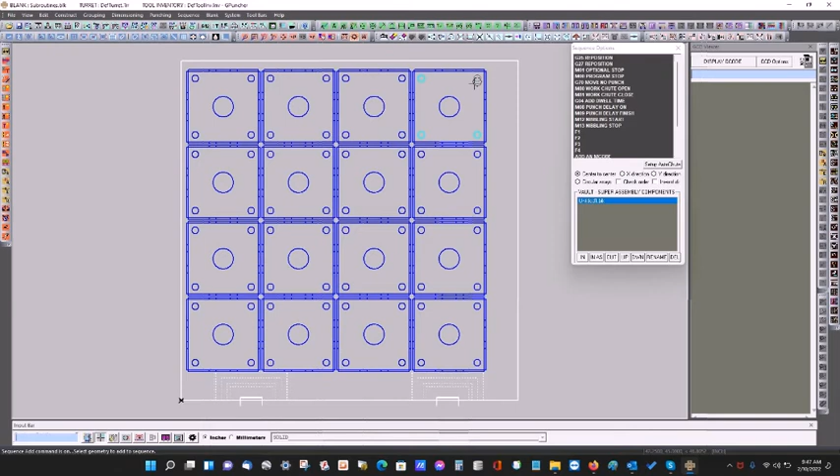The first step is to open a subroutine, and then you can either tell GPuncher to add the same tool. When you do that, GPuncher is going to find the same tool and add it to the subroutine. I'm going to click it, and as you can see, it went and added all the same tool in the part. Now that's the second step.

The third and last step is to close the subroutine. You can close it in X or Y. In this case, I want to punch in X direction, so I'm going to close it in X.

Let's see how it's going to punch. I'm going to slow down and see how it's going to punch. I'm going to say view sequence, and you see that it's punching in X direction.

Now, what would I do to punch it in Y? I keep doing the same: open a subroutine, and then I can either click GPuncher to let it find all the tools, or I can add them one by one. In this case it doesn't matter because I'm going to pick one tool. It's the only tool punching here.

What I'm going to do is close it in direction Y, and that's what it's going to do. Now I can always ask the software and it tells me where it's going to end up. I'm going to tell it, show me where the last hit was done. So I'll tell it, and it showed me, it turns blue, so that means the last hit was here. So I'm going to start my subroutine there.

So again, same steps: open subroutine, and then I'll click add so I can select what tools I want in the subroutine. It can be all of them if I wish. If I want, for example, this one, that one, if I don't care about rotating the turret much, I can click on this one and that one. And then I close it.

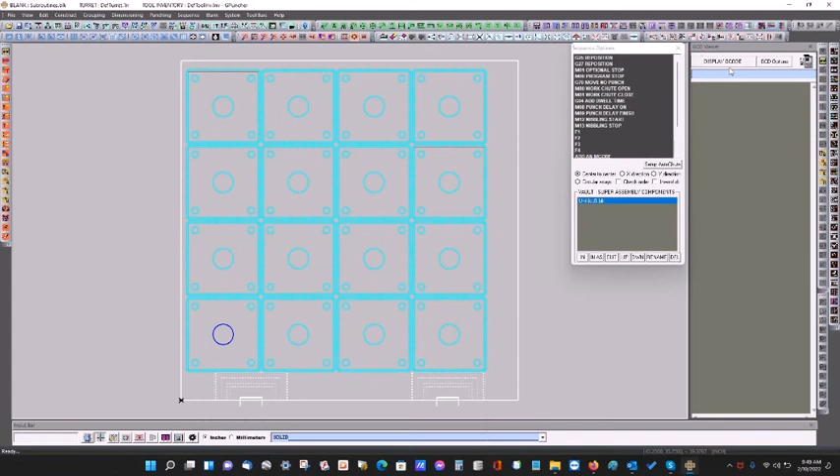If I see the G code, you can see that GPuncher went and generated a G code without the actual subroutines. It's all single hits.

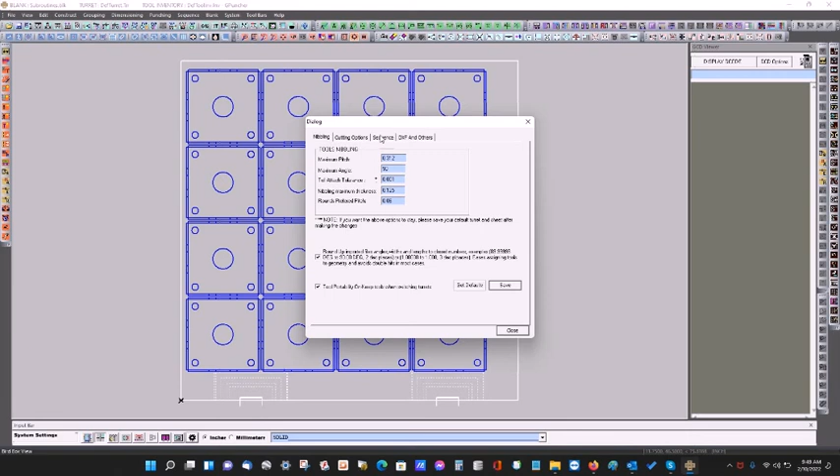Now let's do it again real quick. I'm going to reset the sequence, and go to my options and the sequence tab. I'm going to uncheck the force post processor to generate single hits, so I want subroutines. For this machine, this is an Amada, and it does support subroutines.

So the way I'm going to do it is the same way. I'm going to say open subroutines, and say add same tool. I'll click it, it found the tools, and I'm going to close it. I'm going to close it in X, and ask the software, show me where the last hit is.

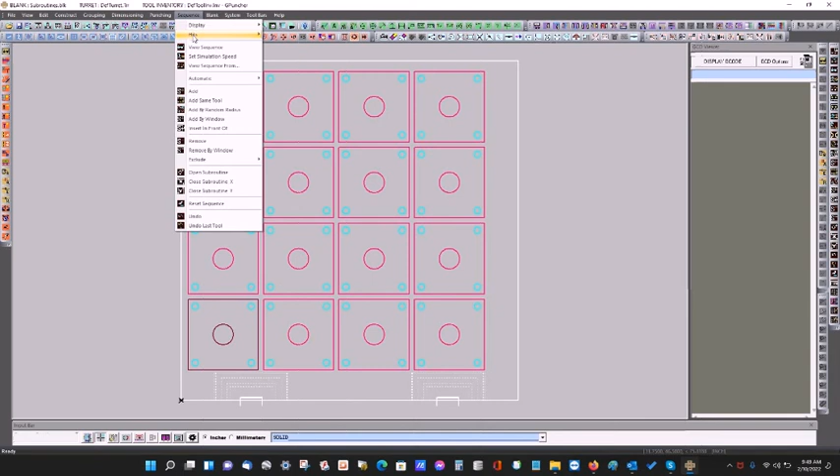Okay, again let me see the sequence. Now, sequence hit, show last sequence, and it's that one. So basically it went like this, and it ended up right here.

So I'm going to say sequence, open another subroutine. I'm going to click this one, and close it in X again. So it went like this, and it ended up right here.

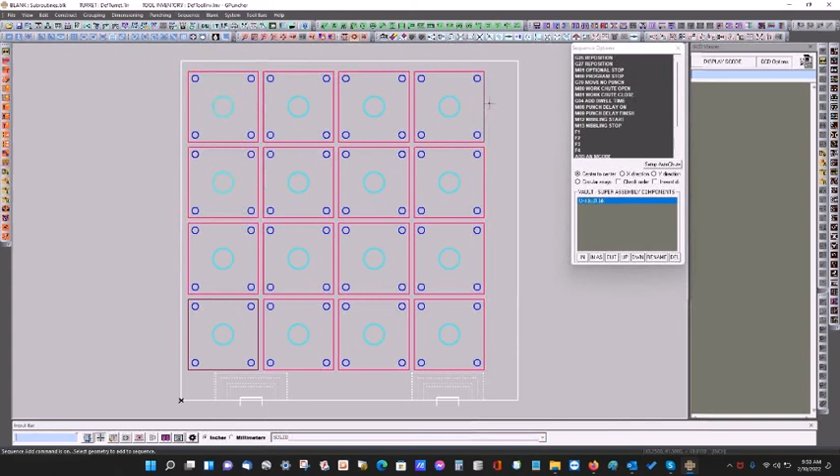So I'm going to open another subroutine, and in this case I'm going to say add same tool. It's going to find the same tool, and I'm going to close it in X. Oh, I can do Y, why not? So it's going to go like this, and it's going to end up on this corner.

And I do the same thing. I open a subroutine, and this time I'm going to choose myself what tools I want, I say add and select this one. And I'm going to close it in X. So it went like this, and it ended up right here.

So I open another subroutine, pick it, and close it in X again. So it went like this, and ended up right here.

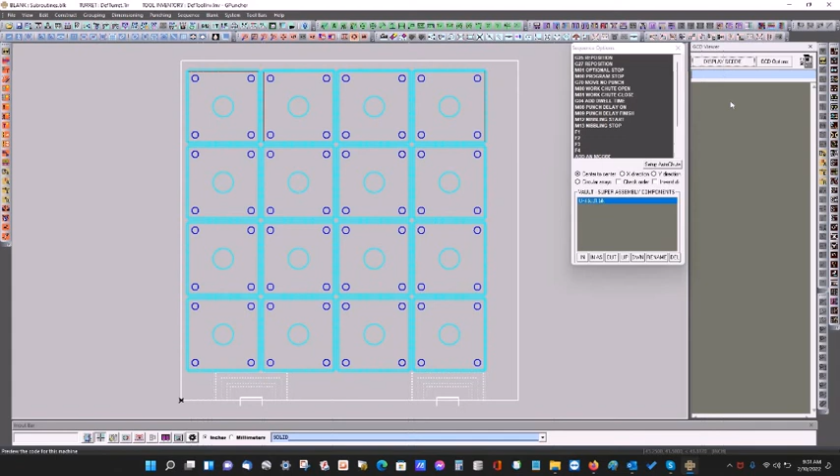Now I see the G code. Since I turned off the single punching for subroutines, now you can see I'm getting actual subroutines, the U1, V1, as they're called out for Amada machines. It all depends on your machine, but you can go with subroutines regardless of whether your machine supports subroutines or not.